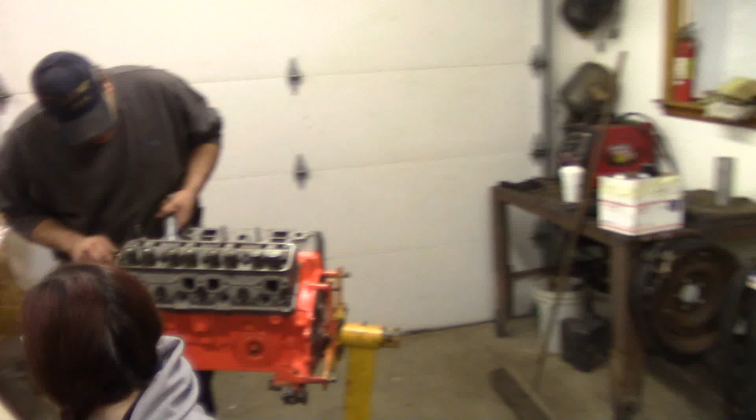God, it's so perfect. Okay, so it's the next Friday. We're working on the motor some more. We pulled a little overtime on Monday. Put the valley pan on with nice RTV.

D. Frank, why is the pan being taken off? Because we were storing some timing components in here. That's where I keep all my timing components, inside the valley pan. Well, after cleanup, I realized I was one Woodruff key short of where I should be, and I'm paranoid now.

Is that kind of like being a day short and a day? What the hell is the saying? Day late and a dollar. A day late, a dollar short. So I did such a good job gluing this down.

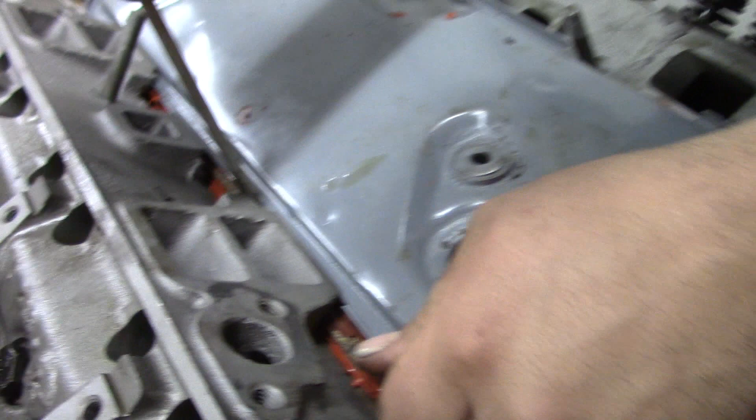It's coming up. That RTV is really holding well. It says something for RTV. It works like a hot damn. Now I'm destroying my new gasket because I think it's not in here, but you can peel it up now and just use a flashlight.

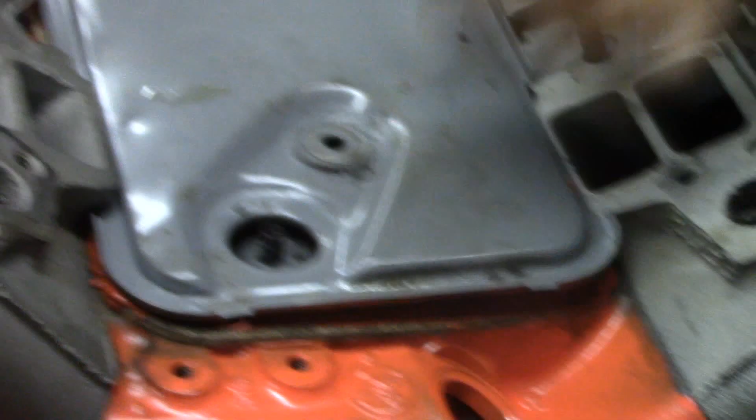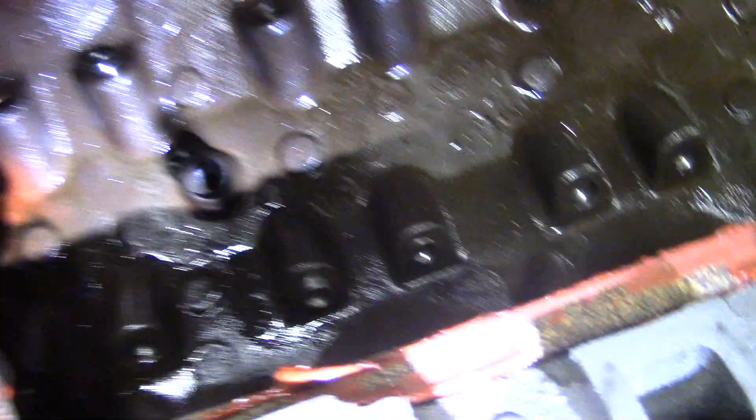It is not in here, and I also realized that we also could have just... Yeah, but if it was sitting like back here, you wouldn't be able to see it. I'm mad about having to do this, but I at least feel... Here, so now, okay, let's RTV that back on there. Can I, well, the parts that are still stuck, can I just glue underneath? I don't know, there's not really any pressure here.

It's nice, really, not really. I mean, I would do what you feel is best. You're the expert, I'm just a parts changer. You get paid for your brains.

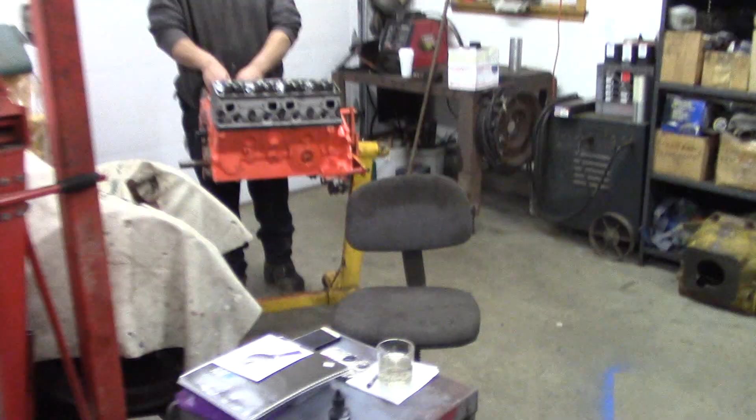Hey, is this our first V8? What do you mean, is this our first V8 job? No, Caddy 2 was our first V8 job. No, this is actually real, not just take it apart, realize it was actually rebuilt, and then put it back together. We were young. We all make mistakes, I guess. Our mind was an open book.

All right, so now I'm going to put more RTV. I would clear all that extra crap off.

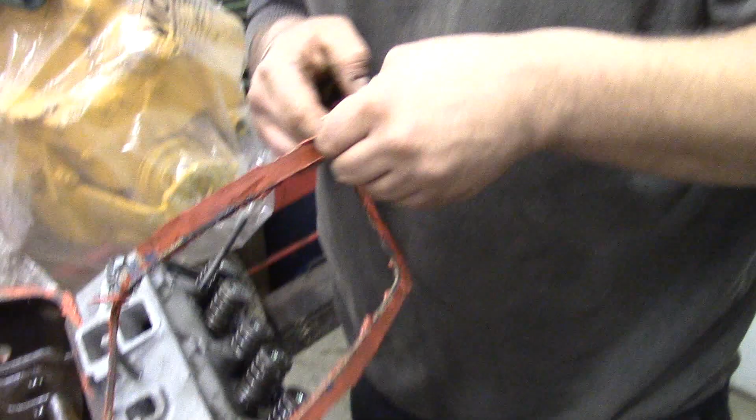Oh wow, it's like I get a reset. It's like a mulligan. Oh what? You don't know that? What's a mulligan? It's a golfing term. Don't drop that inside the motor, for Christ's sake. You go inside for a Woodruff key and you end up dropping RTV inside the intake. Distributor gear will chew it up. A mulligan is a golfing term, and as far as I know, it's like a do-over shot. But you lose a lot of points if you decide to pull a mulligan. But if you have some ridiculously bad shot that lands you in a lake or something, you could redo it. Yep, a real golfer though just plays through, meaning wherever it lands, it lands.

Oh, and our chef here has brought some brownies. I think I'm gonna have to poison test these. Thank you very much, quality control. They're really fucking good. Yeah, I'd say so. Yeah, they're definitely good, I already quality controlled about 3 of them.

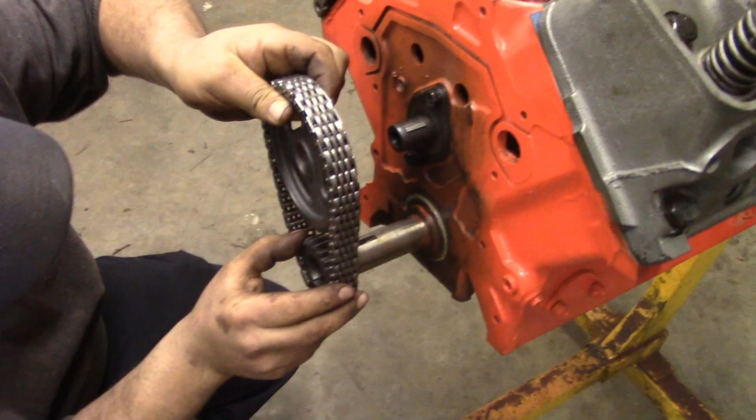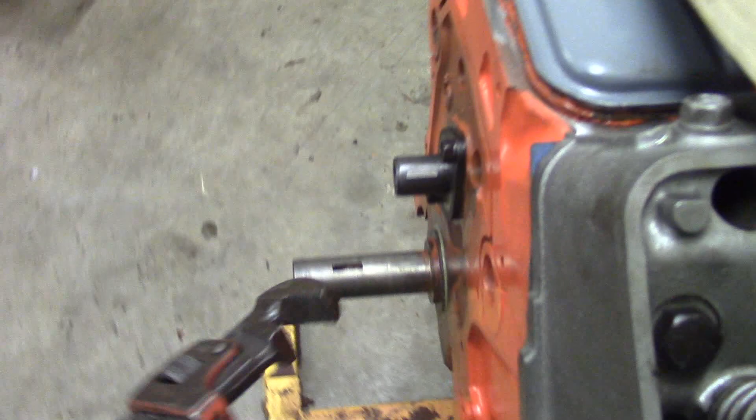Okay, so we're just trying to rotate the cam a little bit so it aligns up properly, and this is the factory Ford alignment tool here. You want the keyway vertically? Yeah, let's try that. Can I get just give me a little skim coat of oil, just help this thing slide on there. It sticks out so much. This, I believe, is close.

Alright, well D. Frank's working on his motor. I'm working on my motor here, making an exhaust flange for it. I think it originally was made to just accept an NPT flange, but I don't feel like buying one, and the larger pipe thread fittings are pretty expensive.

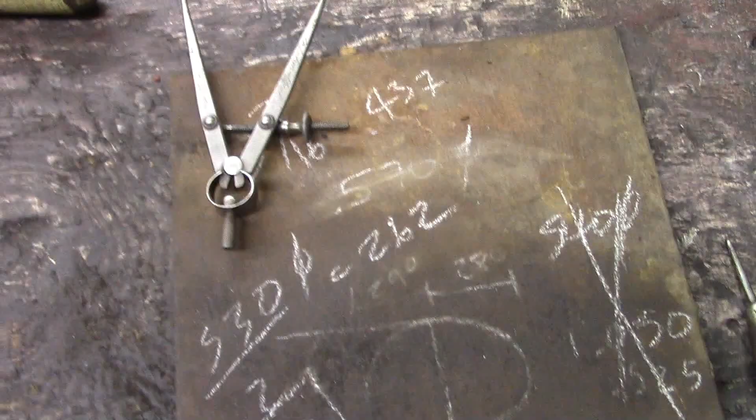So I'm going to make my own flanged exhaust pipe, and I'll show you what I'm doing. First step, I'm going to make a flange to fit on here, drill a hole through it, and weld a pipe on it. Here's the plate I'm laying it out on, it's I don't know, 3/8, maybe 5/16 plate, something like that. I just took a bunch of careful measurements, laid it all out, found my center, and worked outwards and did some quick math over here, as you can see. And it's ready for some more center punching, and I'll start out by drilling the center hole.

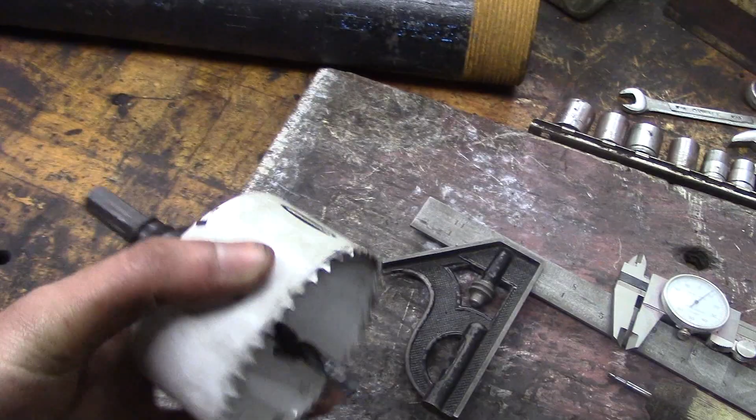Here's the exhaust pipe, this is a 3-inch black iron pipe. I'll use a 3-inch hole saw, drill a hole through the middle, and then I'll drill the 4 holes out here, 5/8 holes for the flange bolts.

Okay, so we are RTVing the timing housing cover there. Yep, we got the chain lubricated and oiled, all lined up, triple checked to make sure it's good.

Tight, all ready to go. Yep. Oh, do you want to talk about the arrangement here a little bit?

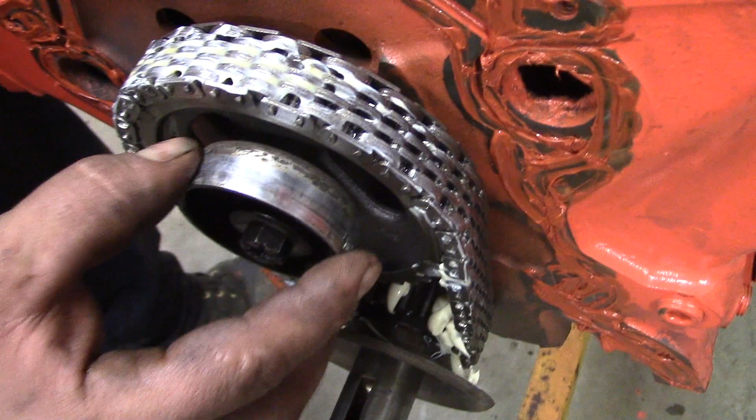Sure. You have the gear, then a keyed spacer, then this eccentric, and then another spacer. The spacer in here is a much thicker one, maybe 3/16 of an inch thicker or so. And then there's a real thick washer.

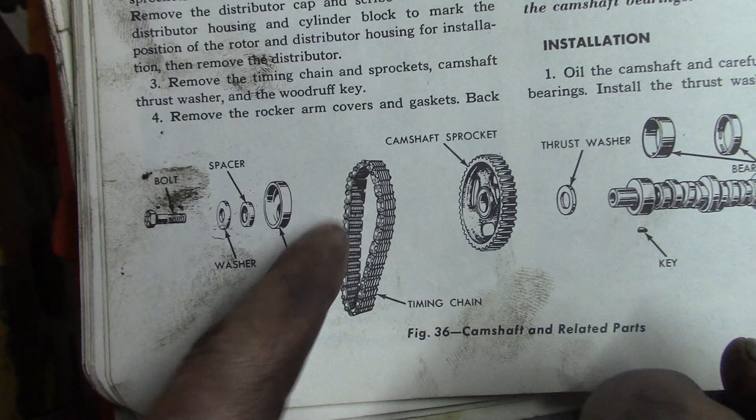Now, when we put it together, we were a little confused because the diagram Ford gives you is missing parts. Do you have the diagram I can show everybody? Yeah, it's missing the piece that holds the cam in. It shows you the bolt, the thick washer, the extra thick spacer, and the eccentric, but it doesn't show you the washer that goes behind it up against the face of the camshaft sprocket.

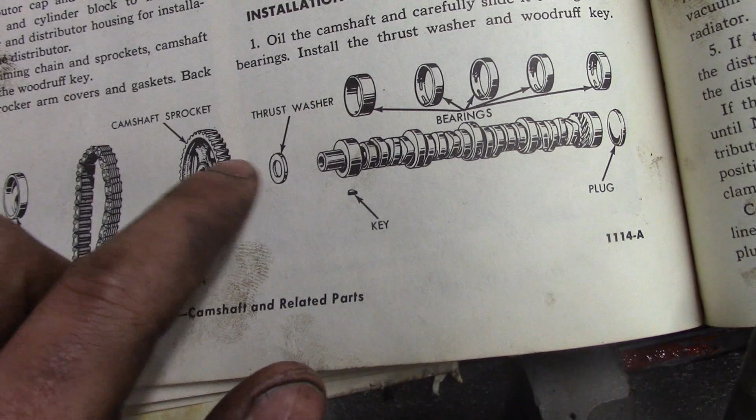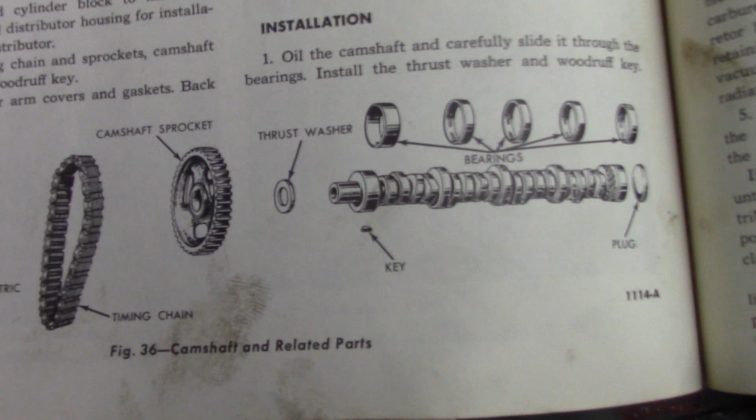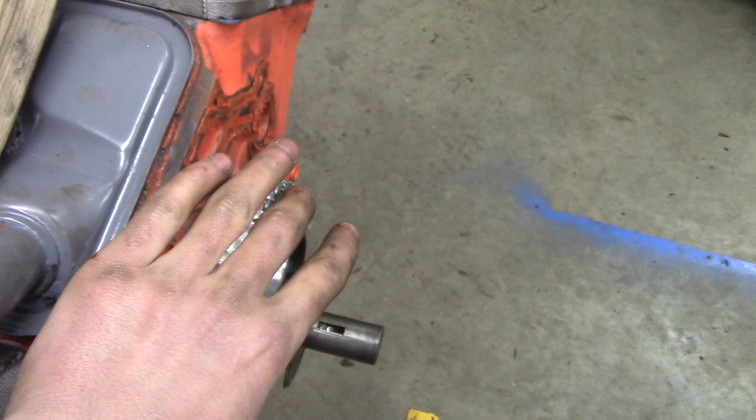We were racking our brains trying to figure out which way it went. We eventually figured out that on the camshaft itself, where the shaft widened out to the first part of the bearing journal it rides in, it had a nice radiused corner. That thrust washer had to have the beveled edge go up against the radiused corner for clearance, because if you put the square edge up, it wouldn't clear. Ford would explain some of these problems, like if your fit isn't right when you tighten the bolt, but they just leave so much up to - well, you're just supposed to guess.

And this is the Ford car shop manual. Original, from the Ford division of Ford Motor Company.

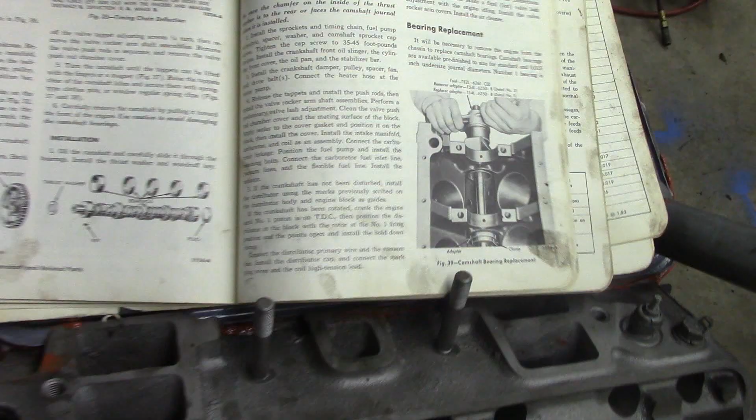Right on. So this is getting ready to come on, so I'm going to ask while I hold it up if you will kindly start a couple of the bolts for me. Let's see, this bolt - okay, this bolt will go in there. Ready for insertion. Yep, go ahead. Should be pretty damn close.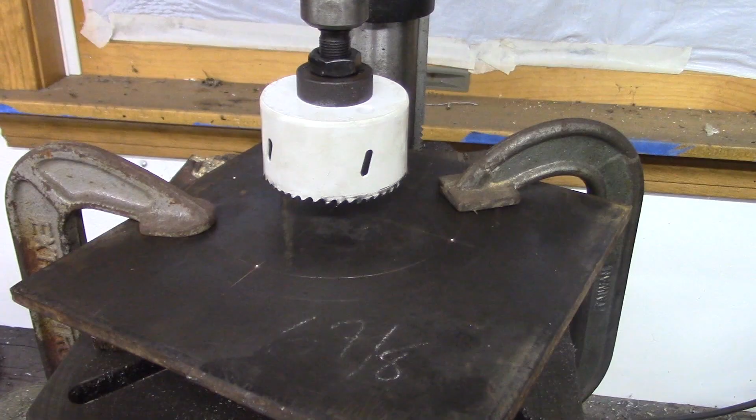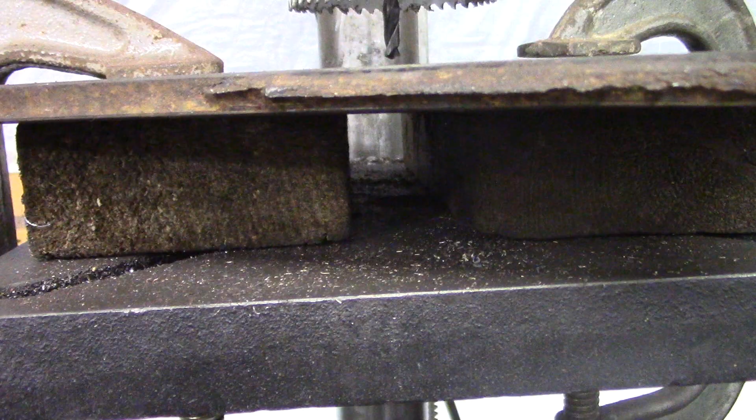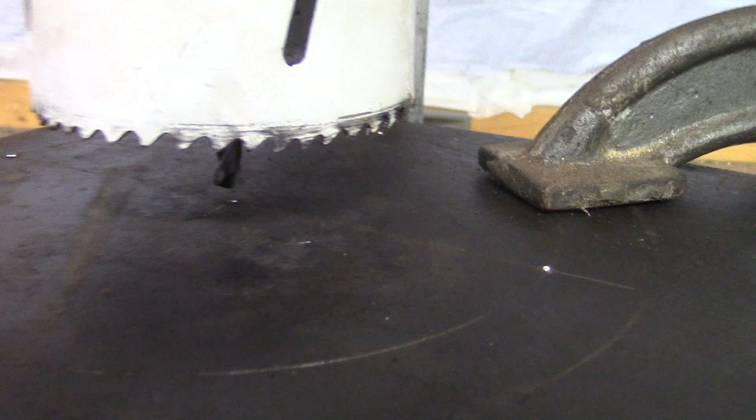Okay, so I got this all set up on the drill press. Got it clamped down. I decided to clamp it to the table of the press rather than just holding it on top of a block of wood. I do have some wood under there so I don't drill into the table. But I decided to clamp it instead of just holding it with vice grips - it'll be more rigid that way, and it'll drill easier. I just lined it up with the center punch hole there, as you can see.

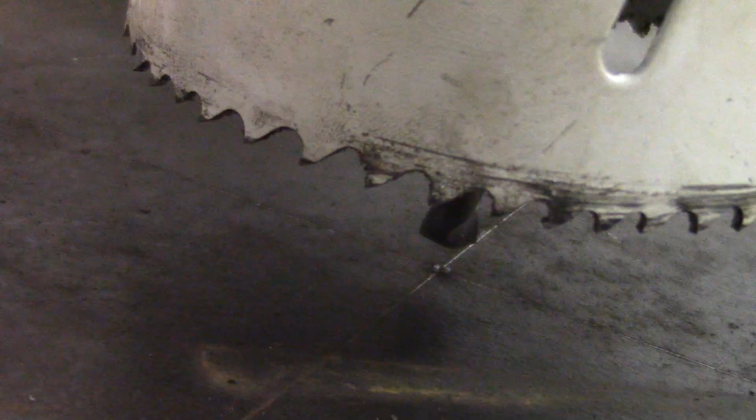You can see the drill point goes right into the center punch mark there. And then coming from the other direction, it also lines right up with the hole.

Okay, we're spinning. You want me to film something for you? No, I got a tripod. Yeah.

Now this is at the lowest speed, unfortunately. It's still 500 RPM, which I think is way too fast, but you gotta go with what you got.

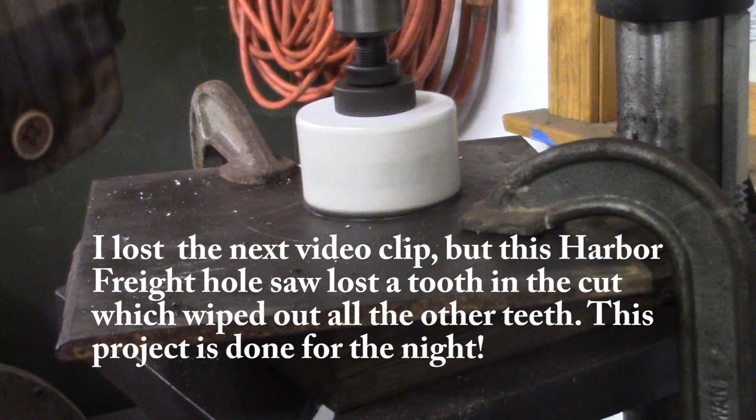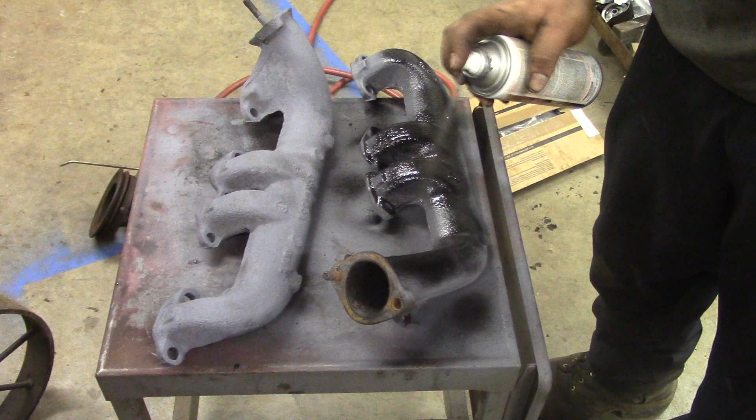I'm just impressed with the quality of this primer paint here - the air gun blew off the primer. I followed the directions exactly how long it said to let it cure for. I brake cleaned it, acetoned it, completely degreased it, and when I was blowing off the dust from it sitting in the shop for a week, off it came. So it was just going to rust and crack off anyway, because this stuff never works - exhaust paint. It looks great when you put the motor together, but beyond that... well, I figured for the couple thousand dollars I put into the motor, you might as well put $5 worth of paint into it.

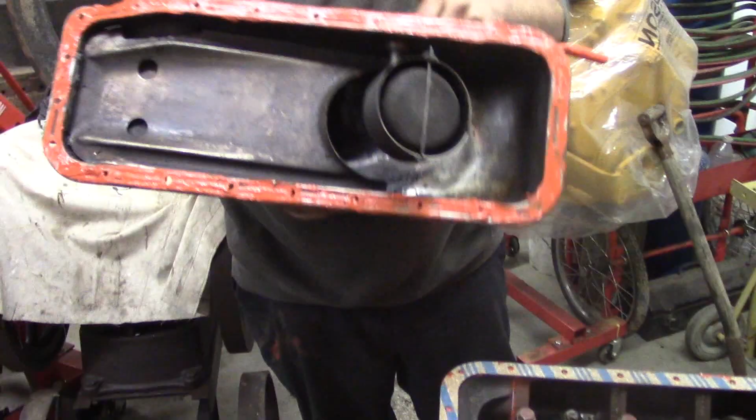Okay, look at that nice gooped up oil pan. Yep, got some nice red RTV. Got the gasket, and the 7/8 16 threads per inch nut. Yep, mongrel thread, GM restoration site.

Yep, because everybody knows GM parts are standard even for Fords. So...

Come on, you're losing it there - you gotta get it all together. Now, don't you need another nut on here for that? Yes, I'm getting there. Oh, you gotta slide that on there, slide the little ring. Actually, no - you put this on first, then you put the little ring. Then align it in the oil pump.

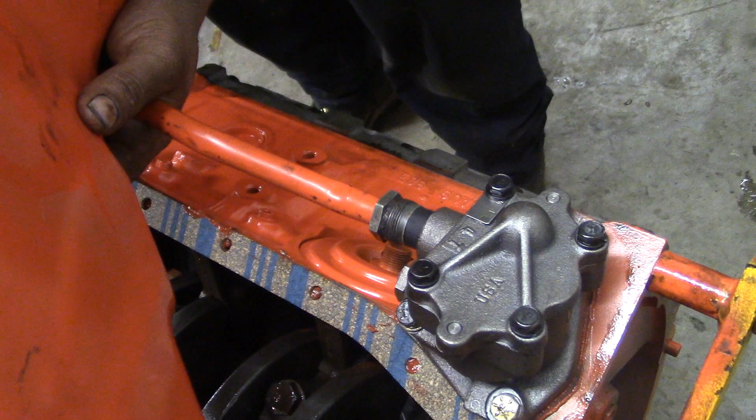Gracefully pivot down the oil pan, get some RTV on your fingers, and you're all set. But you have to take it apart again if you forget to put that special... oh, where's the nut? Just slide that on in there. Make sure to cross the threads so they lock real well. Wait, what are you forgetting? The rubber thing? You could put it on before, as long as you make sure that you got it in - the rubber thing. Yep.

Oh, Jesus Christ. All that sitting down is making me want to sit down. About 25 bolts later and you'll have it all cinched down.

As our friend AVE might say, we have to wait for the silicone to chooch. Is he a follower of yours? I doubt it, are you a follower of his? Of course, I think a lot of my subscribers subscribe to him too. What do you say, that article was written in Canadian? Oh yeah, it was written in Canadian, has to be translated to normal English. But didn't he say Canuckstanian? Yeah, something along those lines.

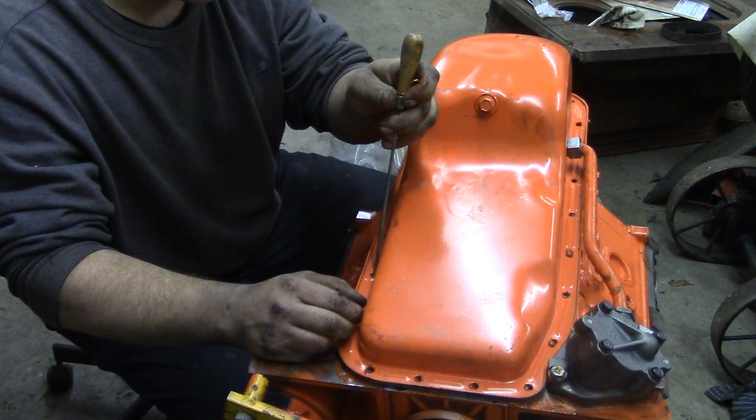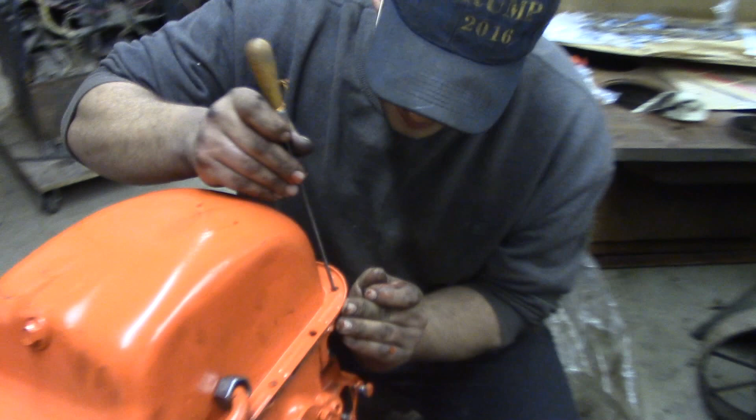Man, the dog gets attacked by the cougar - not the cougar you wait at night in the bars for, the cat kind of cougar. That girl he showed a picture of, oh that was ugly. Holy, yeah that's a cougar for you. That's what Joe Boy would call a high miler. We were walking in AutoZone, some old broad walking in, and Joey goes, 'How are you there, cutie?' And she goes, 'Oh, I'm so old, don't even say I'm good looking.' So she walks in, and me and Joe Boy walk out, and he goes, 'So what's the matter?' He goes, 'That's what you call a high miler.'

Then we're getting fuel yesterday, and some real old lady, real short, ancient, was walking to the door, and she pulled her Crown Vic right up. Oh, Crown Vic, that's classic. Big old one, right up near the door, and Joe Boy - well hey, you do that too, you pull it right up to the door, you don't like walking as much as anybody else. Oh, Joe Boy does that too. Of course, but he goes, 'Come on, young lady, I'll get the door for you.' And he sits there and waits, and tells the guy inside, 'You see how close she is to the pole?' And the guy says, 'She comes in every day, and most of the time she hits the pole.' So we go outside, and sure enough, it was a white car, all red scrapes from the red post. Because she pulls up and just parks by feel, you might say. She plays lotto, win for life, which is funny.

I mean. I mean. Now, why won't this move over?

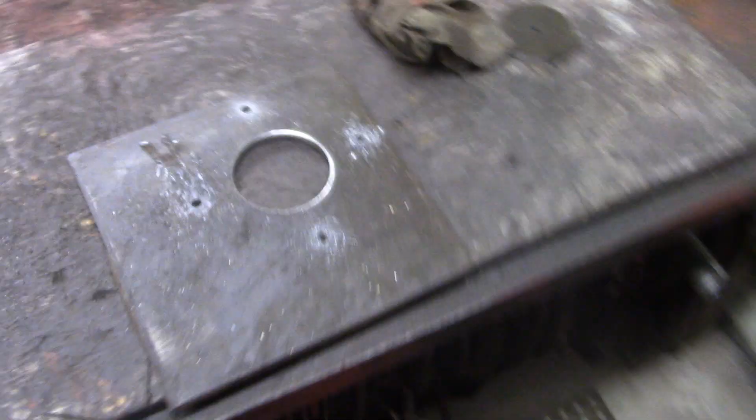Alright, now over here I finally got this cut through. By the way, I didn't mention this is another day - my buddy and I didn't get much headway this past Friday because I screwed up my hole saw, and he needed some gaskets he didn't have. So this is a couple days later. I finally got this thing cut through, and holy shit, this is some tough steel. I don't know what it is, but it made quite a racket cutting through, and my drill press wasn't too happy about it. I got that cut out and the holes pilot drilled, and I'm going to through-drill them to the final size of 5/8 of an inch, which should align right up to the exhaust flange on the cylinder. I have a line, can't quite see it on camera, of the outside that I'm going to cut with an angle grinder over size. I'll clean up the inside of this hole a little bit and bring this flange to the farm, use the lathe there, and turn the OD nice and round and smooth.

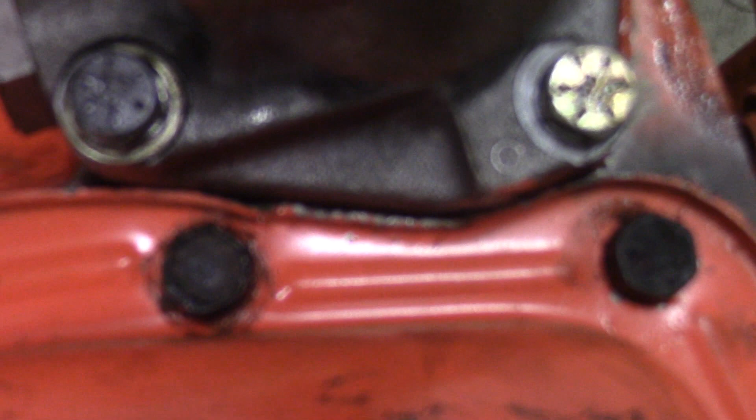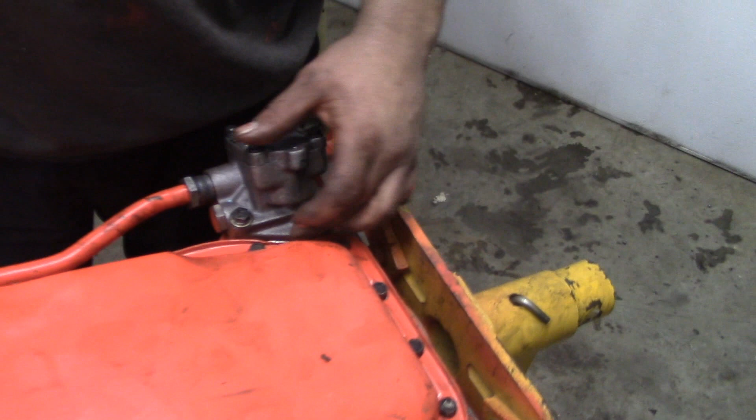Man, you are still tightening these bolts. What is the deal? Well, I have to take the oil pan off again because it was hitting the oil pump just a tiny little bit. So what I did is I took the 4.5-inch angle grinder with a cutting wheel on it and shaved the side of the oil pump down just a little bit, then slightly persuaded the pan over, and it lines up just perfect. You'd think a pan that used to go on the motor with the exact same pump would just fit, but I guess Ford designed it with a zero clearance, zero tolerance sort of deal in mind. Now I get bonus points for using a cutting wheel to shave a surface. Well, you have to use a cutting wheel if you're doing grinding. Right.

And if you've got to cut something, you're really better off using a grinding wheel. Oh, it works great. Yep.

Well, it is coming together. One of the last components going on the motor, starting to look like a real V8 again. Well, the last component is the car - the car has to go on. And the exhaust manifold, the carburetor, valve covers, all that. Water pump. I will say I love these washer things.

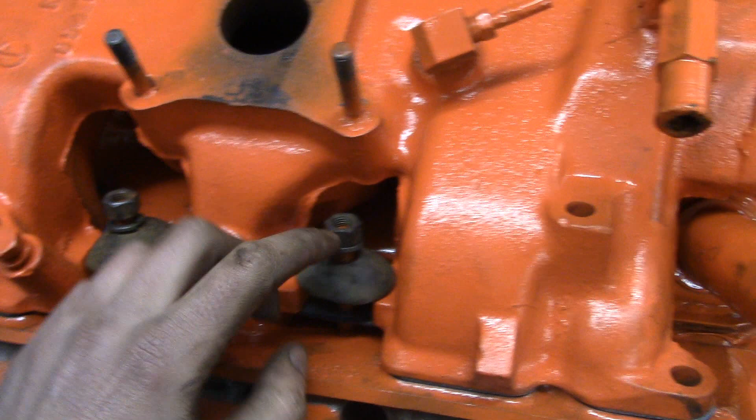Yeah, they clamp it down like. Just like on the exhaust. I think it has that on the exhaust manifold too, doesn't it? These little clamp washers. I don't believe so. Oh well, in my case it does, and I love it because the heat from the exhaust doesn't ruin the stud. It just might corrode this big washer thing. I thought you were going to come out with some statement. No, you hate them. No, it's really good because if you try to loosen any other exhaust manifold where the bolts are just going through the manifold, they're all rotten to hell. You're never going to get them off.

I love when they snap. Don't you just love that? Right in the block. Yeah, perfect.

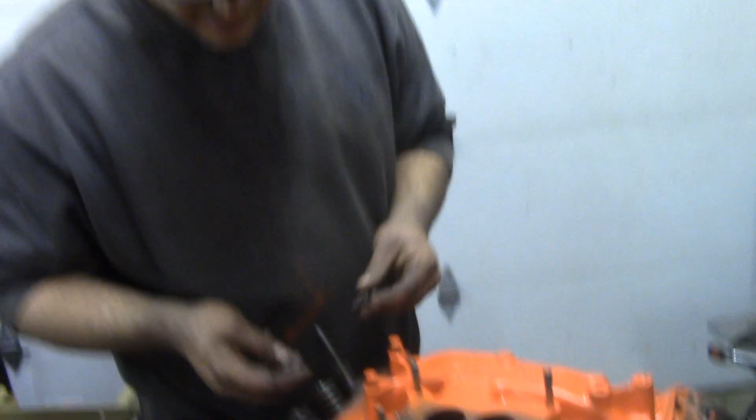Flush, yep. So well, everyone knows when America needs a better idea, Ford delivers. Well, they had a few different variations of a better idea. And then they had another campaign slogan for a while: Ford, built by people who love to make cars. I think one of the best is Ford, drive one. Or wait, was that? Yeah, that was a Ford slogan, wasn't it? Yes. Yes it was. I'm trying to remember some of the other ones. There was 'a better idea.' Oh, 'built for fuel economy.' Yes, in the 80s, the Ford trucks - it would say Ford, and instead of saying Built Ford Tough, it said built for fuel economy. Because that's what I look for in a pickup truck. And as we know, Fords are not thirsty.

Yeah, and then what about this project going on here? What's this project here? What's Amber working on? What is that? Well, she's not done yet. She doesn't want to show you.

Now over here, back to my flange, I definitely think this is some super duper heavy duty steel of some sort - I couldn't even cut this. Well, I could cut it, but with a lot of difficulty with the angle grinder. So I'm just going to torch cut this out. But I'm going to show you a little trick. I obviously don't want to cut too close to the line, and it's hard to see the line when you're cutting with a torch, whether you draw it with a Sharpie or a chalk marker or whatever. So I just make a whole series of punch marks along the area I want to cut, and those punch marks don't go away until you go over it with the torch. So I'll torch this out, grind the slag off so it doesn't destroy my cutting tool, chuck this up in the lathe, and turn it nice and clean.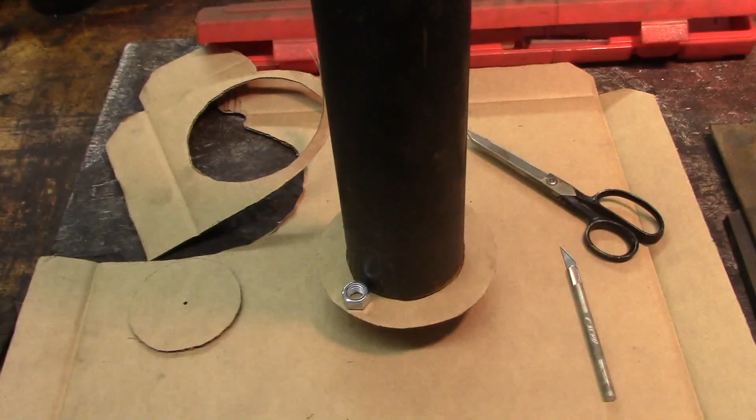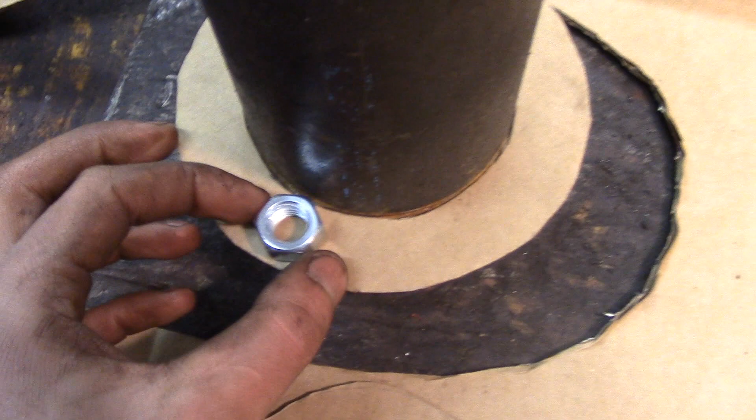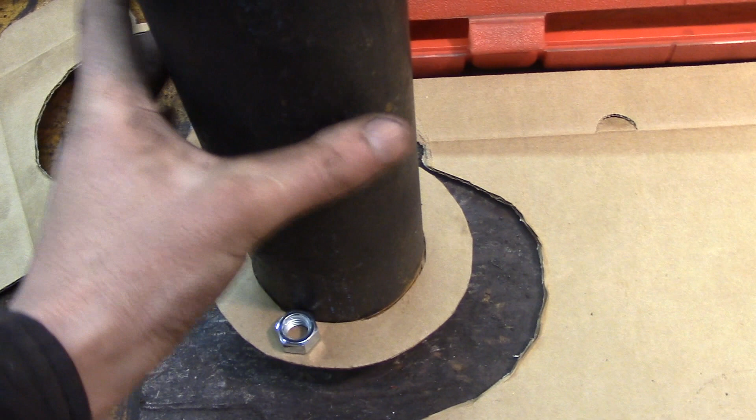So the next flanges I'm going to make are for the exhaust pipe itself, and I made a little cardboard mock-up here just so I can get a visual idea of what the size of the flange would look like. I have it sized so I can have a half-inch nut centered in it, and the nut won't hang off the edge and won't interfere with the pipe. This is a 3-inch NPT iron pipe, by the way, so it's about 3.5 inches outside diameter with a 1-inch flange, and I think that'll look just fine. I'm going to make a couple of these so I can have a straight section and an elbow, and bolt them together with the flange - I think that'll look pretty cool, and I won't have to buy expensive 3-inch threaded pipe fittings.

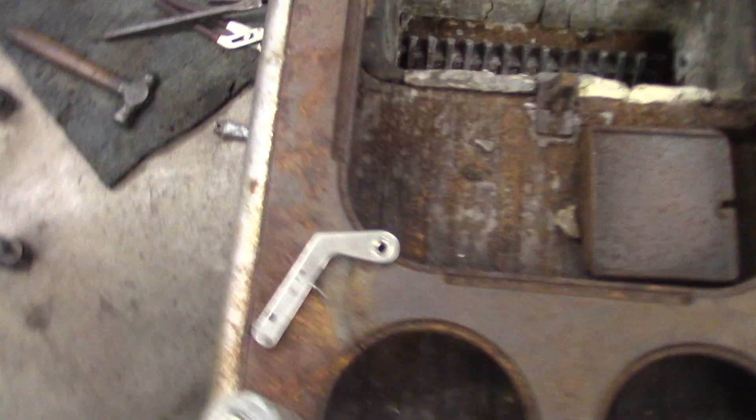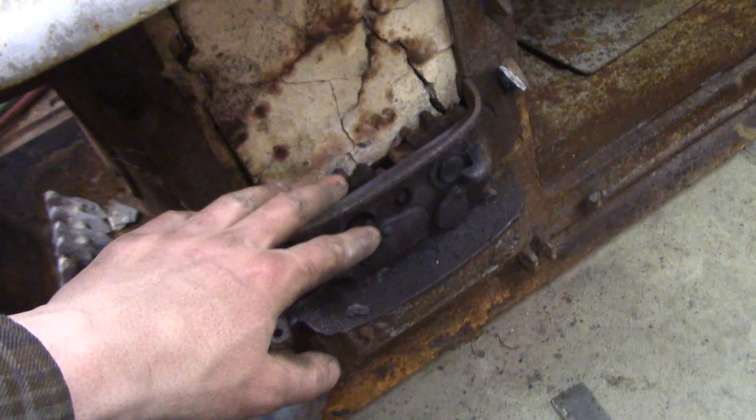I'm doing a little tinkering with my early 1900s or potentially late 1800s Glenwood Model K coal-fired cook stove. I'm just working on getting it all loosened up. Pretty much the only moving part on it is this shaker grate assembly here. Unfortunately, as I was loosening up this part, it just disassembled itself, so I'll see if I can get a replacement. Here's a little look at the shaker assembly - there's a little triangular drive there that you put a handle on and you can shake it back and forth. The two shaker grates are connected with these gears, so they both rotate opposite each other at the same time.

Alright, the engine's put away once again for bed. The stove is shoved off in the corner - except, well actually it's not the corner at all, it's the dead middle of the shop, but whatever.